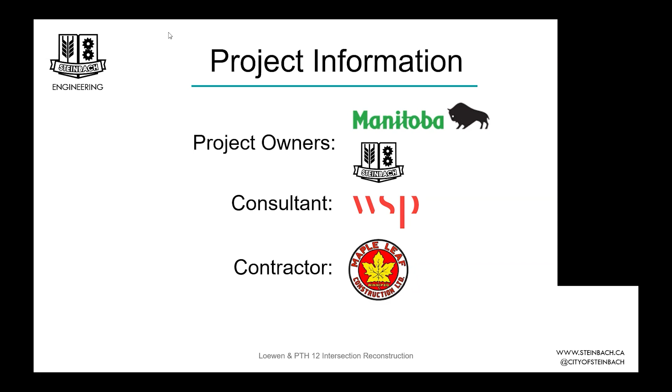Project delivery followed the typical design-bid-build format. Pre-qualified contractors were invited to submit a competitive bid for the work, with the lowest bidder being awarded the project. This project was awarded by City Council on May 21st for just under $10 million.

This is planned to be a two-year project, and the scope of work primarily consists of 700 meters of water main replacement, 900 meters of wastewater sewer replacement, 570 meters of land drainage sewer replacement, a total reconstruction of the intersection and roadway surface works within the project limits, and a conversion of overhead hydro servicing to underground within the project limits.

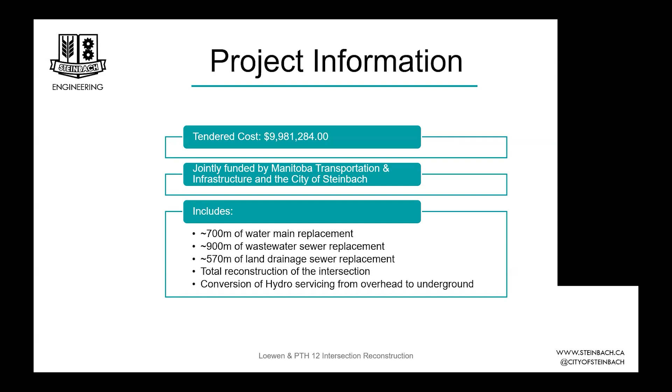The city undertakes an annual traffic count program to collect and analyze traffic data at all the signalized intersections in the city. These reports have identified that this intersection is operating at a low level of service. Level of service is measured by length of delay for each traffic movement. Improvements are needed to bring the level of service back to an acceptable level, as well as accommodate future growth in the city.

Since the intersection was going to be reconstructed, this was viewed as a good opportunity to replace the underground infrastructure, which is nearing the end of its service life. Replacing this infrastructure ensures its integrity so that we avoid having to do repairs under the new pavement and impact residents and businesses with more closures in the future.

As the city grows, our increasing population puts additional strain on our existing infrastructure. This project was also a great opportunity to increase the capacity of key wastewater, sewer, and water main segments so that the city can continue to support new development.

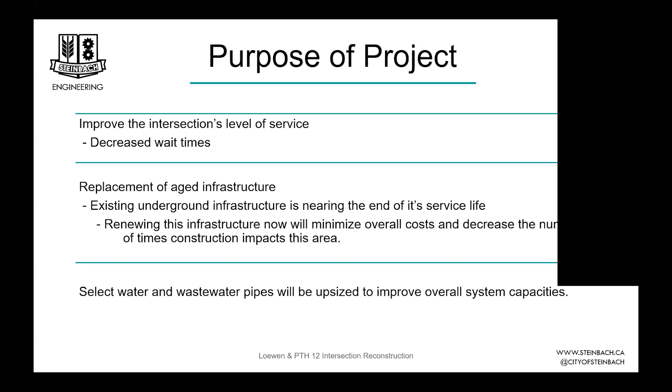The image that is now shown highlights the project area, which extends from midway between PTH 12 and PTH 52 and up to 40 meters east of Home Street on Loewen Boulevard.

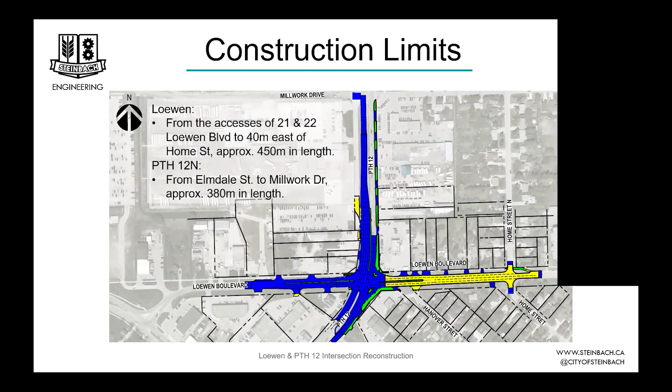On PTH 12, the limits extend from north of Millwork Drive and Stonebridge Crossing up to Elmdale Street. This image illustrates the traffic flow improvements being included with this project.

Eastbound and westbound Loewen Boulevard currently have a single lane for both left turn and through traffic. Each direction will now have both a dedicated left turn lane and a through lane, which will greatly reduce delays.

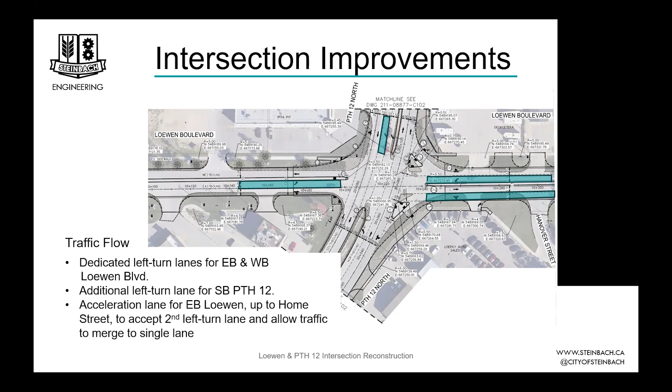Southbound Highway 12 currently has a single left turn lane onto Loewen Boulevard. A second left turn lane will be added, and in order to receive it, eastbound Loewen Boulevard will have an acceleration lane added that will end at Home Street. This will ensure vehicles have sufficient opportunity to merge back into the single lane of traffic without impacting traffic in the intersection.

This image identifies some of the improvements for pedestrians at the intersection. The size of the southeast yield island has been increased, as well as the concrete paved areas at the northeast and southeast boulevards. This was done to provide a larger refuge area for pedestrians as they wait to cross the intersection.

We've also added detectable warning tiles at all the pedestrian crossings. These tiles provide a textured surface that assists visually impaired people in recognizing the boundary between pedestrian routes and the active travel lanes for vehicles.

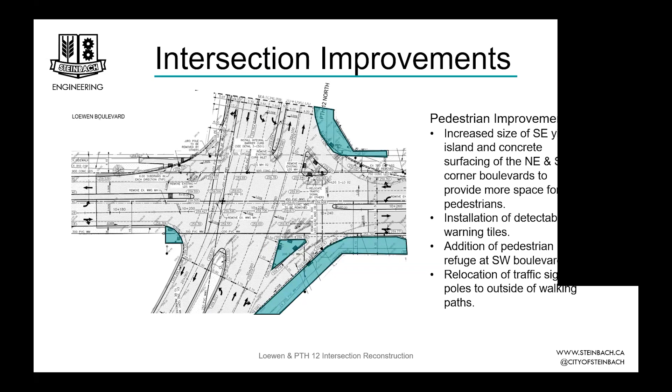We've also added a concrete paved pedestrian refuge at the Southwest Boulevard, and a reconfiguration of all the traffic signal poles that will move them outside of the walking path for pedestrians.

This slide highlights some of the active transportation improvements being done with the project. The existing bike lane on westbound Loewen Boulevard, west of Home Street, can no longer be accommodated within the roadway due to the addition of two additional lanes for vehicular traffic.

Bike traffic will now be redirected onto the North Boulevard at the Home Street intersection and will continue west to PTH 12. This is not shown in the image, but PTH 12's East Boulevard between Loewen and Stonebridge Crossing will also be reconstructed so that it is fully concrete pavement from curb to edge of right-of-way.

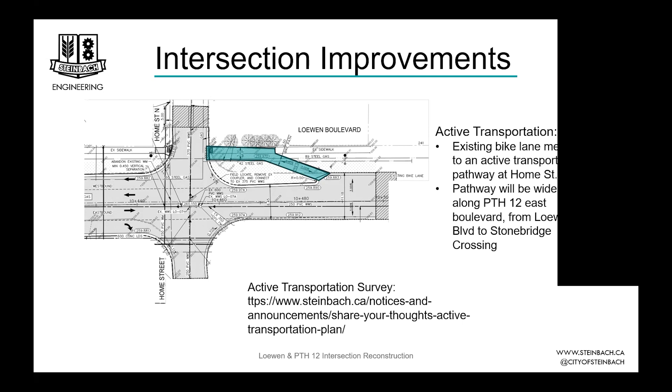Next, we'll cover the traffic safety improvements. For the northbound PTH 12 right turn yield onto Loewen Boulevard, we realigned it to create what's known as a smart channel. A smart channel encourages lower vehicle speeds and increases safety at the pedestrian crossing. By increasing the angle approaching Loewen Boulevard, it forces the driver to slow down in order to make that turn.

As well, northbound Hanover Street traffic and westbound Loewen traffic will no longer be able to turn left from or onto Hanover Street. This change was made due to how close Hanover Street is to this intersection, as well as the increase in the number of lanes that would need to be crossed for this movement. This decision was made to improve safety and ensure safe traffic flow for the intersection.

As well, all of the hydro poles and overhead wires will be removed and converted to underground servicing. This has reduced the number of roadside objects that a vehicle could collide with during an accident.

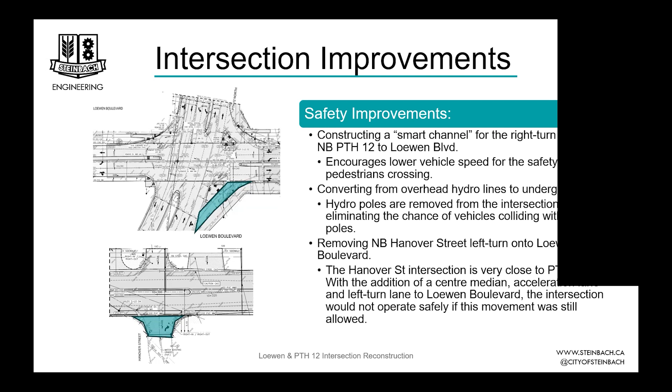Lastly, I'll cover the environmental improvements. As some of you may know, there were previously gas stations surrounding this intersection. Gas stations can leave behind contaminants that need to be remediated from the soil.

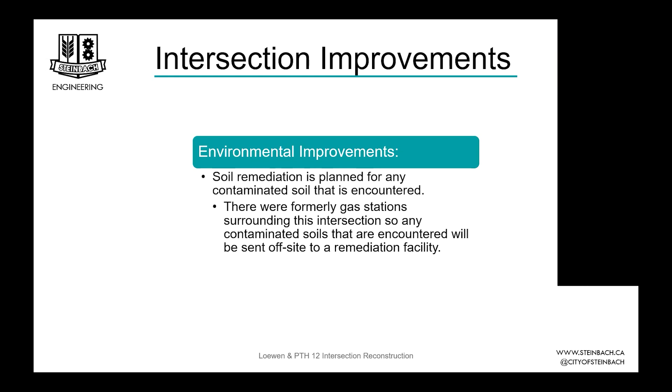Any contaminants encountered as part of this project will be analyzed and handled appropriately, which would include soil remediation at a specialized processing facility.

Now I'll cover phase 1's traffic staging plan, phase 1 being the first year of construction. As some of you will have noticed, phase 1 traffic staging has begun at the beginning of this week and will continue to roll out as the project progresses.

Any of these changes would be presented to the public. Not all closures will need to occur at the same time, so they will be initiated as required by the work, and that information will also be sent out to the public via the city website and our social media pages.

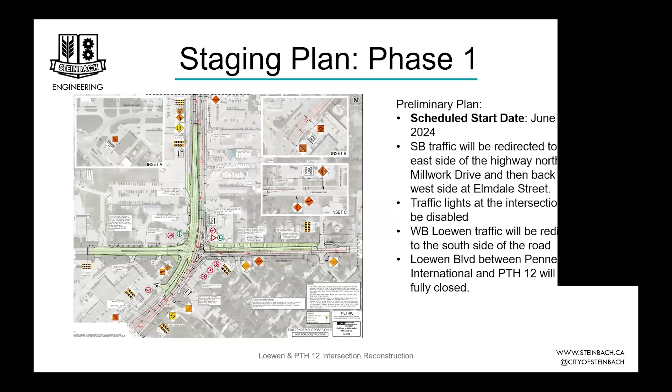For the first phase of construction, traffic will be shifted to the east side of the highway via switchover lanes north of Millwork Drive and south of Elmdale Street. Traffic lights at the intersection will be disabled, and northbound and southbound PTH 12 traffic will not be allowed to make left turns.

This is a preliminary plan that will be reassessed at the end of this year's construction. But in general, traffic will be switched over to the west side of PTH 12, and traffic will be shifted to the north side of Loewen Boulevard, east of PTH 12. This information will be updated and made available in the future once it has been determined.

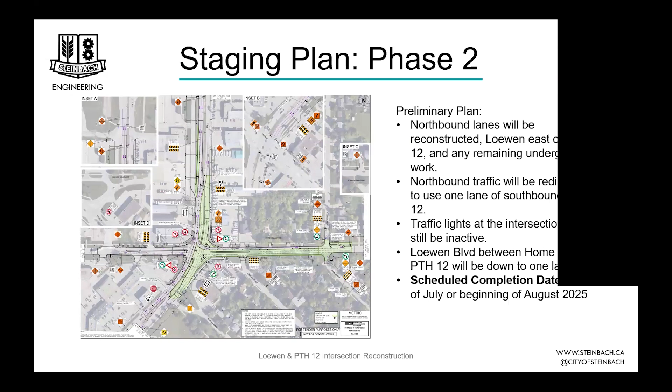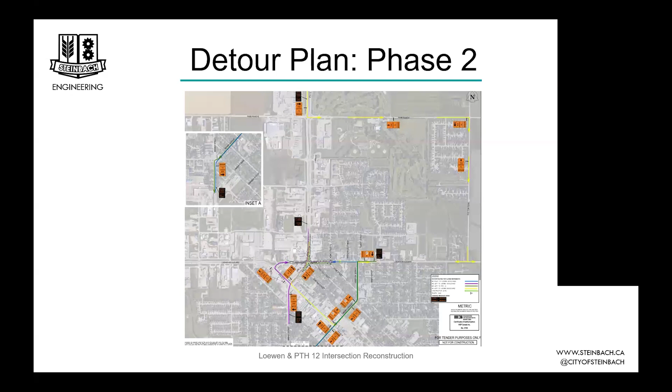The phase 2 detour plan is a revision to the phase 1 plan as well that adjusts the detours to work with the phase 2 closures. The information shown is also preliminary, and changes will be made available once they are determined.

While this project will provide benefits to the community, there will be temporary inconveniences as the work is completed. Expect traffic delays due to the reduced lanes, as well as an increase in traffic volumes along the detour routes and other side streets. Access to businesses and residences will also be affected, but the city has made provisions to minimize these effects as much as reasonably possible.

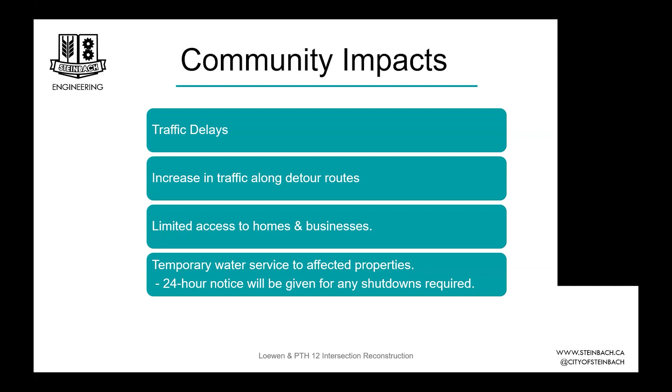Businesses and residences will be placed on a temporary water service as water main renewals take place. A minimum of 24 hours notice will be given for any temporary loss of water due to required shutdowns to switch over the water service. The duration of full shutdowns will be kept to a minimum and typically are less than an hour.

This presentation has highlighted a number of benefits that this project will bring to the community, but to briefly recap, the improved intersection geometry will enhance safety for both motorists and pedestrians. The improved level of service for the intersection will reduce traffic delays and support further growth within the city.

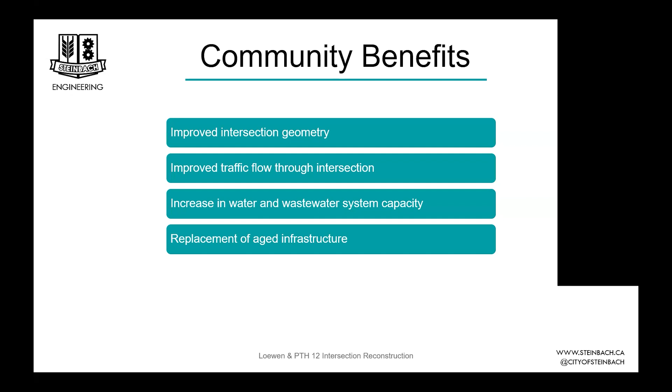The increase in water and wastewater system capacity will also allow the city to continue to grow. And the replacement of the aged infrastructure that is nearing the end of its service life will benefit the community. All right, now I will hand it back over to Bea, who will close out the presentation. Thank you so much, Erin.

In terms of communications regarding the intersection renewal, project updates will be shared through the city's website as information becomes available. Communications regarding road or lane closures affecting residents and businesses will be shared through the city's website and the city's social media accounts. You can find the links to the city's website and accounts on Facebook, Instagram, and X by visiting...